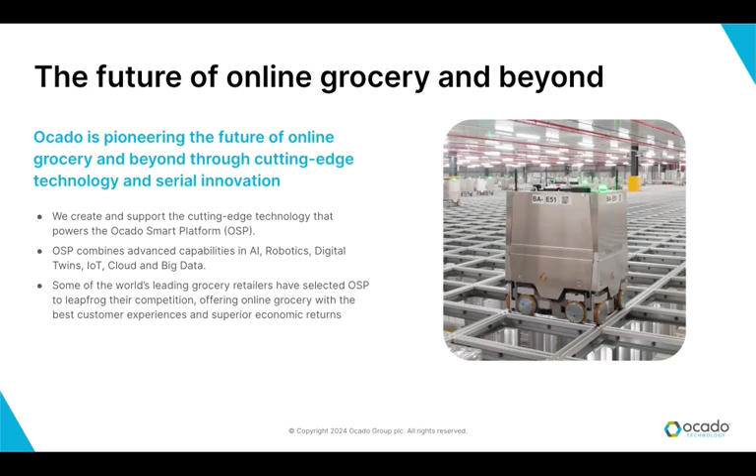What does Ocado Technology do? Ocado Technology develops solutions for online grocery distribution. We are a technology company providing end-to-end warehousing, storage, and logistics solutions for supermarkets. We started by creating our own supermarket - in the UK there is a shop, Ocado, where people can order groceries. The shop is online only, so there are no physical stores, just modern warehouses, which I will tell you about shortly. At Ocado Technology, we are more than 5,000 people working in different domains: software engineering, artificial intelligence, robotics, and data science - a lot of smart people working on interesting projects.

The business model of Ocado Technology and Ocado Group is to sell these warehouse solutions to different supermarkets around the world. The biggest clients are in North America - we have Sobeys, Kroger, Coles supermarket in Australia. We recently opened supermarkets in Japan and are working with Korean partners. So there is a big spectrum and a big challenge for us to create those solutions.

Just to visualize how Ocado is organized: the conventional way has delivery vans bringing goods to the warehouse, and then from the warehouse everything goes to the shop. But here we just have a warehouse, and the delivery goes straight to the customer's home.

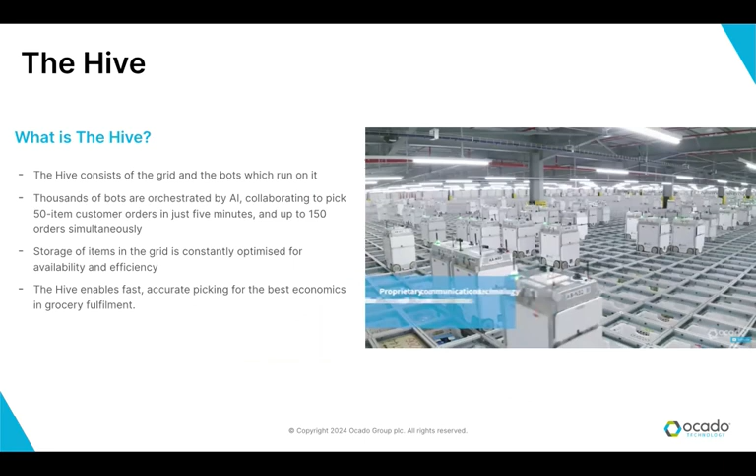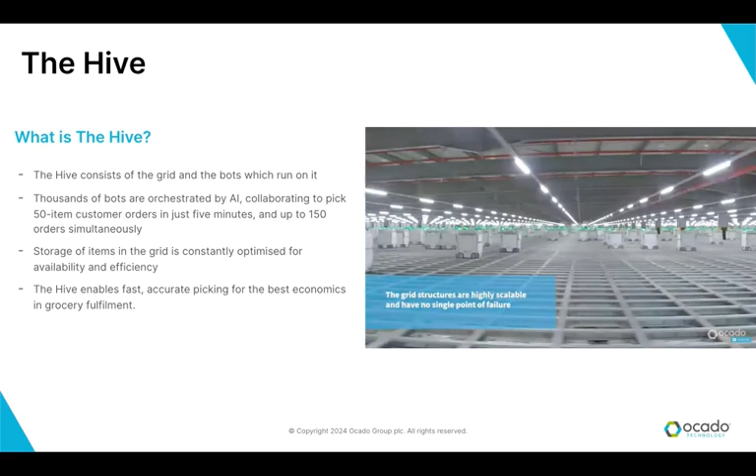So what is the Hive, and why do I talk about it? The Hive is a three-dimensional storage facility where robots move on top of a grid, collecting items and bringing them to the packing stations. This grid is three-dimensional and can be sized in different scales - applicable for small or large warehouses. The biggest grid we have is in London, with maybe 400, 500 robots, if not more - I might be mistaken on the exact number, but it's huge. We have two such grids next to each other: one for ambient temperature, the other for chill temperature, for products that go in the fridge. The robots are coordinated independently - they're not aware of each other, but they're coordinated from the top.

Here you can see the way we simulate and model our grid, because it's a complex system. Before releasing it, we need to understand the optimal amount of robots that can go on the grid, what operational conditions we can set, and what possible faults can happen with those robots, so we model and create all the possible faults.

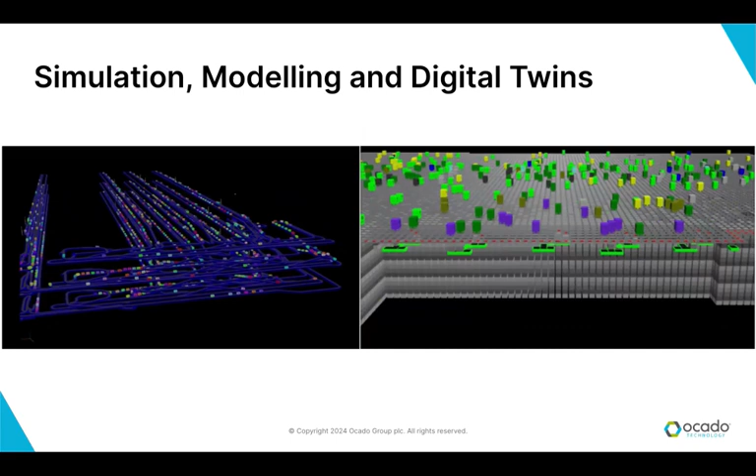On the left-hand side is our old generation warehouse, where everything operated with a conveyor belt, requiring much more land and space. We created that simulation after the warehouse was built because it was old technology, and we wanted to analyze how things were working. For the new warehouse, we first created a digital twin, built a model, evaluated different conditions, and only then built the warehouse. We still do it this way to this day - create a grid in simulation, create a twin, evaluate conditions, and only then build the actual warehouse.

Okay, now I'd like to move on to our most advanced product that is already operational in many warehouses in the UK. We call it on-grid robotic pick.

Previously, customer items picked up by those robots would be packed at human stations. But in this solution, some items are packed already by the robots on top of the grid directly. This way, we save even more space.

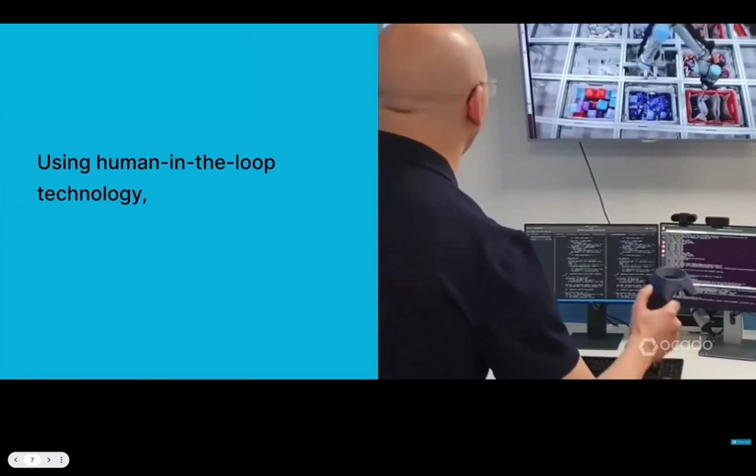While the order is being prepared, we use telemanipulation to control those stations, and a lot of machine learning to understand how to grasp the items and how to pick them.

So these are the stations on top of the grid, as you can see better in this video. The robot is moving. The robots on the grid, I call them washing machines - they come, deliver a storage container with an item, and the robotic arm directly goes there and picks for the customer.

But why are we here, why do we still do research, why are we so interested in robotics? The reason lies behind the need to grasp a large variety of items. We sell anything you'd find in a supermarket. Everything has different packaging, objects with different properties, and there's a need to create sophisticated manipulation capabilities handling different types of items.

For example, a bag of crisps needs to be handled very differently from an avocado, which is easily bruisable. Or sometimes we have a vision challenge - there might be a mix of different teas in storage, and we need to understand which one to pick, because there are such fine differences in packaging from producers.

In addition, packaging is always changing, so we can't control what the distributors provide us. The marketing might change and they come up with a completely different design. So this means we need to handle any general object - that's our challenge, to handle absolutely everything. This is possible to some extent - we do use robots, but we can't yet handle everything.

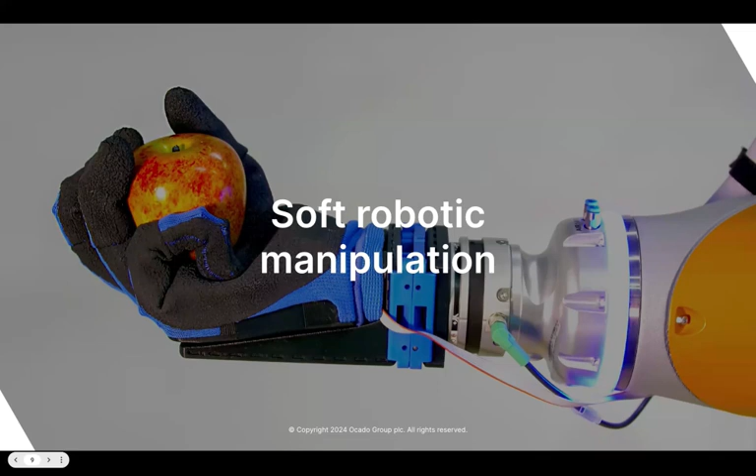So this project covers soft robotic manipulation. We work with different soft grippers and target items that are easily damageable. Moreover, when we do it, we look at the environment we're grasping within.

These are the top views of the storage containers we can have in the grid scenario. We handle items that are very scattered, items that are relatively easy to pick, and also items that are tightly packed with maybe very few gaps between them. Here we exploit the environmental conditions - if we have a wall, we can push an object against it so we have a better quality of grasp.

So we created these scenarios. The top three rows are the 3D printed objects, the emulated objects, and at the bottom you can see the representation of how it is in the warehouse, how it comes to us from a distributor.

We had all these different robotic hands provided by partners from across Europe. The project was coordinated by the Technical University of Berlin, and there's a hand followed by them, and then some hands from Pisa - maybe you've seen some of them.

So these are the grippers we tested, and in the course of the project we went through several iterations of this hardware and performed benchmarking and evaluation.

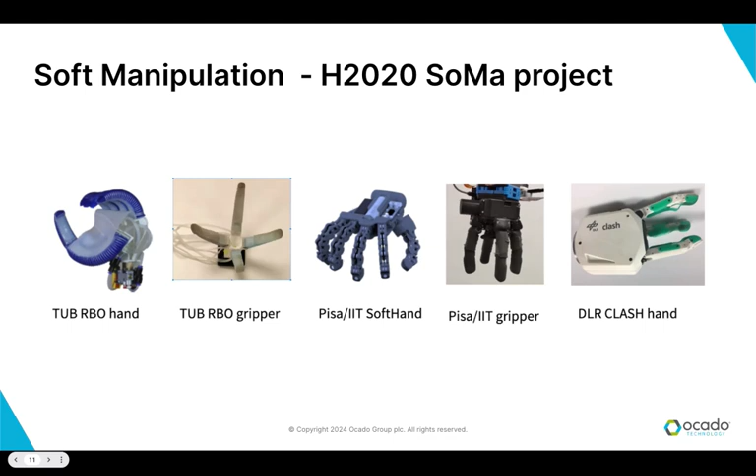So there are many things that we need to evaluate and look at. What we did in our evaluation is change the approach angle and looked at what are the best ways to grasp the objects with those hands. Maybe there is a gripper that allows relatively easy change of orientation to grasp multiple items efficiently.

This just shows us a final demonstration, sped up. Because it's a research project, we absolutely understand we can't go with high speeds. This shows how we're exploiting the environment for different types of grasping, in order to form different relations with the items. And eventually we'll clear out the whole storage container.

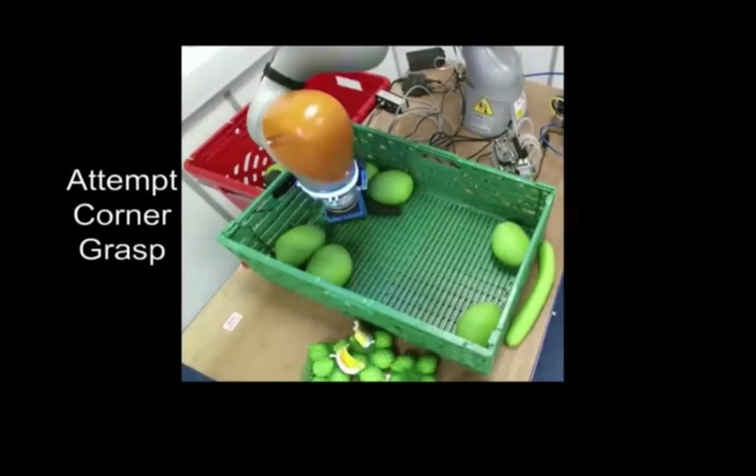Then we also engaged in collaborative robotics, creating a robot assistant that would be able to work in our warehouse and help with performance of some of the maintenance. This is a project that I coordinated to work towards the end of it. A little bit of a baby, but I'm glad that baby graduated.

Here you can see the task example. The technician would come to the conveyor belt—in some cases you might have a still conveyor belt system—unscrew the top lid, perform some cleaning operation inside, and then mount the lid back. In this case, you need to provide assistance to a human.

In order to provide this assistance, you need to understand the intention. And when you understand the intention, there are more challenges because the operation is not scripted—you are dealing with a human. This means there might be uncertainties, unexpected events, situations that go out of control, and the robot needs to take into account all those situations and also provide help proactively.

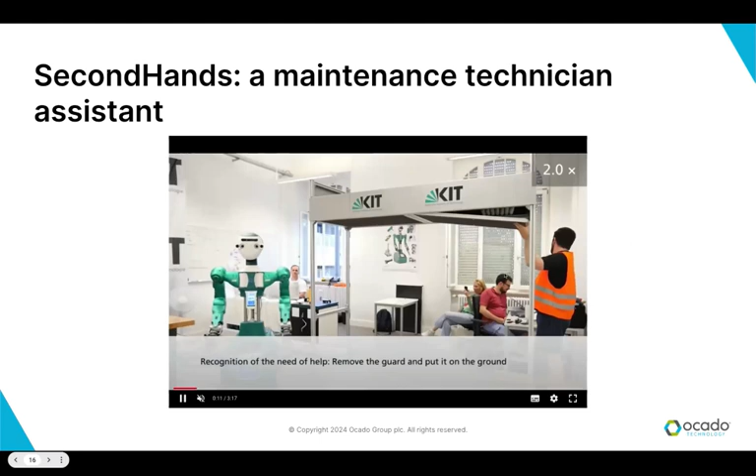So this is what we worked on. Here is a little demonstrator, which hopefully loads. Here we remove the top lid, then the robot goes—I can see Giorgio went away, because this is something similar that will happen in the SestoSenso project in one of the use cases. The robot is moving, leading the manipulation operation, adjusting its grasp in order to have better stability, and helps the human placement. Then it continues.

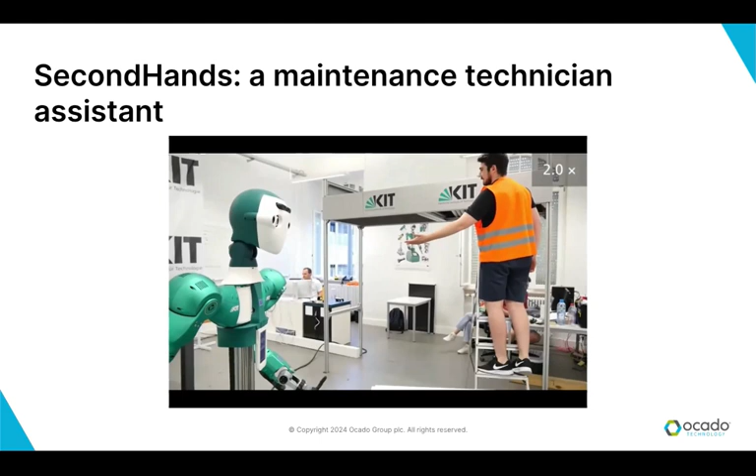And then the robot can also help bring some cleaning materials, assist, etc. You can give commands with voice, or the robot can recognize the activity based on visual perception.

Now I will move to some of the projects we work on now. Again, we are still interested in advanced manipulation capabilities to effectively expand the range of items we can handle. The first project is coordinated by University of Genova—this is the IntelliMan project, where we try to understand how a robot can efficiently learn to manipulate in a purposeful and highly performant way.

In that project there are several use cases—example scenarios inspired by industrial cases where we test the technology and innovation. From the Ocado side, we are looking at manipulation of fragile, loose, unpackaged fruits and vegetables—when you need to handle individual items, or maybe handle multiple smaller items at the same time and pack an order in a designated punnet.

Maybe customers are ordering, say, 200 grams of Brussels sprouts, then the robot would need to provide order on demand—similar to when we go to a physical supermarket and select our fruits in a certain amount. So this capability could potentially be implemented for an online supermarket as well. Then there's a use case of a kitchen scenario, and a use case where we assemble flexible wires into safety connectors for automotive.

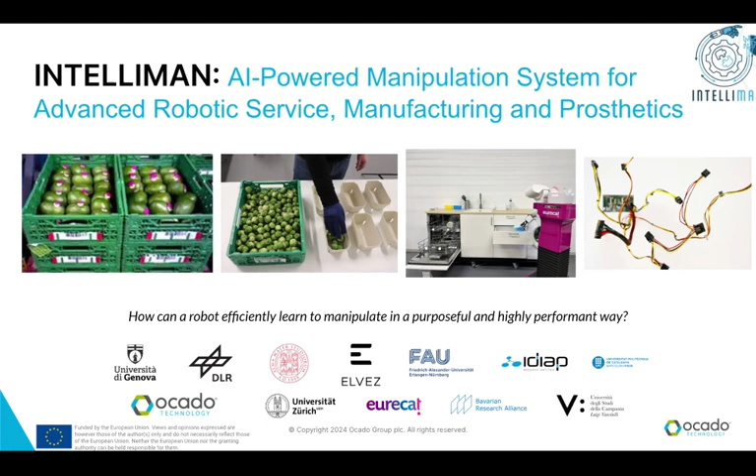So, looking at our use case in detail—why is it complicated? Well, first of all, the environment is very dense. The items we're dealing with have high variability: different sizes, different stiffness. It might be very easy to damage some items, while some items might be rigid.

We need to consider this, because at the end of the day we want to deliver undamaged goods of good quality to the customer—damage is absolutely unacceptable. As we do in many projects and in a lot of research, we look at the way humans perform operations, and by looking at this we can understand the most efficient and effective strategies that humans can implement.

Here particularly we have noticed how people differentiate between grasping individual items one by one, or grasping multiple items together. There are different strategies that can be used, and we are learning from this. Based on that, we don't only design our grasping approach, we also design the hardware we're using.

The hardware can be inspired by the way humans do things. We don't aim to replicate a human hand, but we aim to replicate the capabilities of human manipulation skills. The project is ongoing, this is the initial prototype we've created. The gripper is designed by University of Genova, Giovanni Berselli.

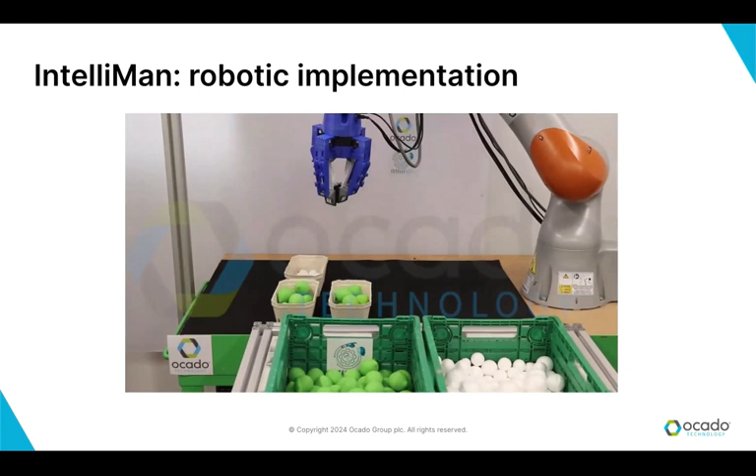That's the gripper. One example here is how, with maybe limited tactile perception capabilities, we can grasp multiple items. The next stage would be to understand how we can reduce this damage. We perform different tests which help us understand how the criteria and key performance indicators are implemented for different scenarios and hardware configurations. So this is this project.

The next project is called SoftEnable. Here we look at how to manipulate things, but the challenge is manipulating flexible objects. When it's a rigid object, we have certainty - even if we don't know the model, we can still relatively easily predict its motion inside the gripper. But with items like fish or meat, anything that deforms unpredictably or has different stiffness qualities, we need a different manipulation strategy.

This project is for 4 years. Fish and similar items are one use case, and there's another use case: the hospital scenario where nurses need to handle personal protective equipment. Before surgery, they prepare piles of PPE and hand it to the dressing-up stage for the clinicians and nurses. This operation is very repetitive and also requires manipulation of highly flexible items.

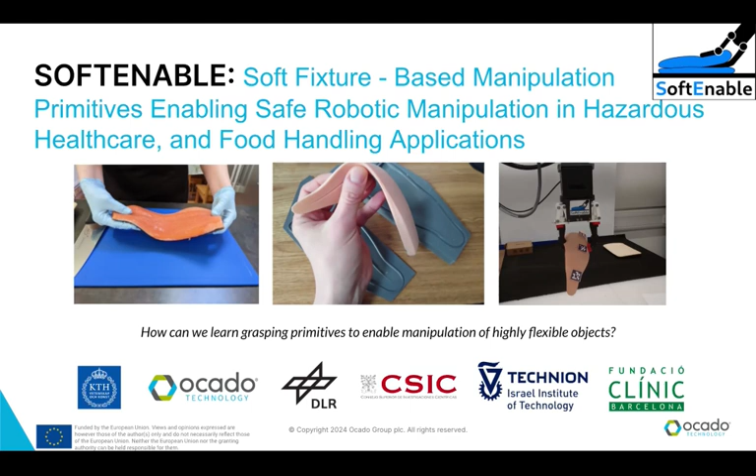It's not only grasping, placement comes into play too, because if you have a tray you're packaging for customers, there are certain rules for how you pack fish. The fish should go with skin on one side, flesh on another. If you place a second one, you can't overlay the two because you contaminate the flesh. So you need to control the placement in space, and that brings in control of the shape of the fish, which depends on the way you grasp.

Here comes the SestoSenso project, the project we're all working on, that's why we've had a meeting here. We look at manipulation of large items coming into our inbound area, the items coming from delivery lorries into the inbound area, then loaded into the grid. These items come in, and need to be unpacked, unwrapped, unloaded from the pallet, and placed inside the grid.

We look at bimanual whole body manipulation, and we're keen to try different sensing technologies, to see how applying tactile skin and other sensing modalities, such as proximity, can help improve the control we're developing for the robot. Here's an example of things from the warehouse - there are absolutely different shapes of objects. Things can be rigid, maybe heavy, or articulated inside, like this bag of potatoes, where the potatoes move inside, so you don't have a stable item to manipulate.

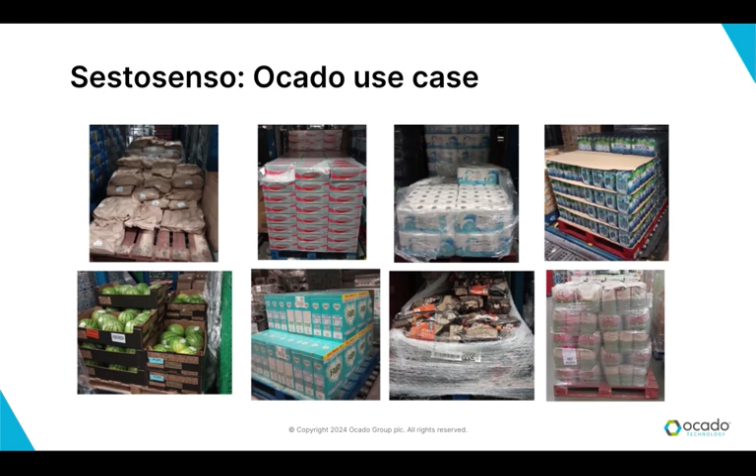Looking at the system requirements, we performed some studies of human grasping, trying to understand how humans do things, what are the challenges, what are the strategies. Humans might be lifting something, rotating objects. When we pack, we might be sliding an item, we might be rearranging. These are all things we need to take into account.

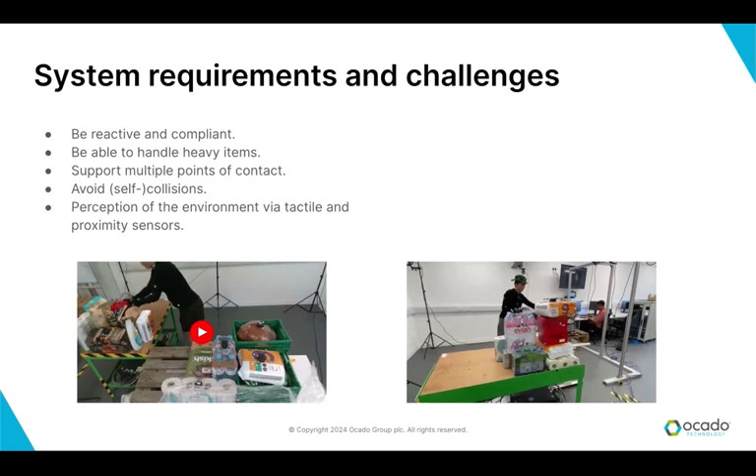And absolutely, without any perception of the environment, we can't handle anything that is deformable, anything that is fragile, and essentially not a virtual solid block, because we will be damaging, losing, and dropping items.

There are some questions we need to answer. How can we determine those kinds of contact points? Sometimes we might have a sensor available, sometimes we might miss sense, how to propagate this and predict, and how to handle the unreliable performance from sensors, because it is hardware.

Sometimes, even if the sensor is good, over time we have some deterioration of signal, some damage. So how to detect that and understand when it's time, maybe, to change the sensor or adapt your control strategy to the appropriate sensor signal.

Again, we look at safety, how to understand if a contact is expected, from an object, or unexpected. Maybe the robot is working in a collaborative environment with a human, whom we need to detect. So there are many things which we take into account.

And I think that's it from my side. If you have any questions, I would be very happy to answer.

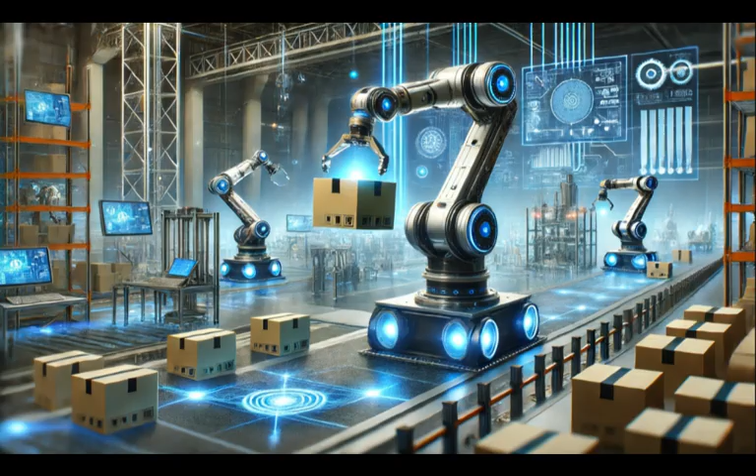In the gripper, do you have tactile perception there, or is it just compliance?

So that's just exploiting the compliance of the gripper together with environmental constraints. We didn't put any sensor.

I have a question. In the previous slides, you mentioned that these boxes have walls, and you can use this function of pushing objects to then pick them up. Maybe you could elaborate how you implement these types of functions.

Yes, so this is part of our planning. We would design a planner that takes a different repertoire, and then, based on sensor information from the environment, for example, we have a scene where we place items. We would have a camera which gives a point cloud, so we can see some gaps in the scene. We can also use our proximity sensor on the wrist of the hand to explore the environment, to enhance the understanding from the robot's perspective, of all those gaps.

And then the planner would recognize the gap in the scene, and it would send a signal to the controller to implement a specific action. So you need to create a planner, and then you need to send a command to get your sensor information and send a command to the controller to implement a certain type of action.

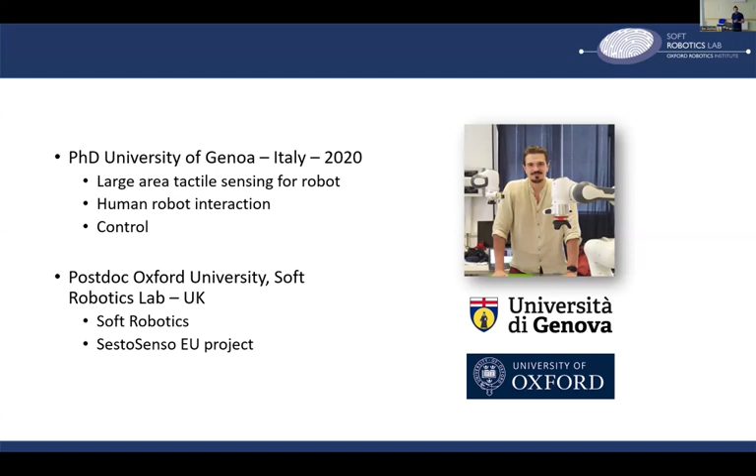Then after the PhD, I moved to Oxford when I started working also on soft robotics, and now I'm basically 100% working on the SestoSenso project where we are trying to embed tactile and proximity sensing. So, that's basically the outline of my talk here.

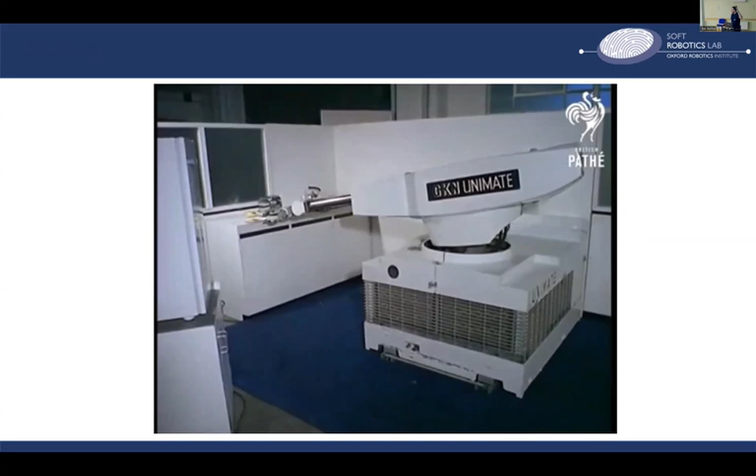I would like to start by saying why tactile sensing is important for robots. I like this video, this is a very old video. The robot that you can see there is called Unimate. It was the first industrial robot ever commercialized, so we are talking about 1960. It was groundbreaking at the time.

And a few years later, the company released this video, showing their vision of the future. They were saying in 40 years, that's what the future will look like: robots are going to share the environment with humans, supporting them in everyday life tasks. Now it's about 60 years from this video, and I think no one has such a kind of machine.

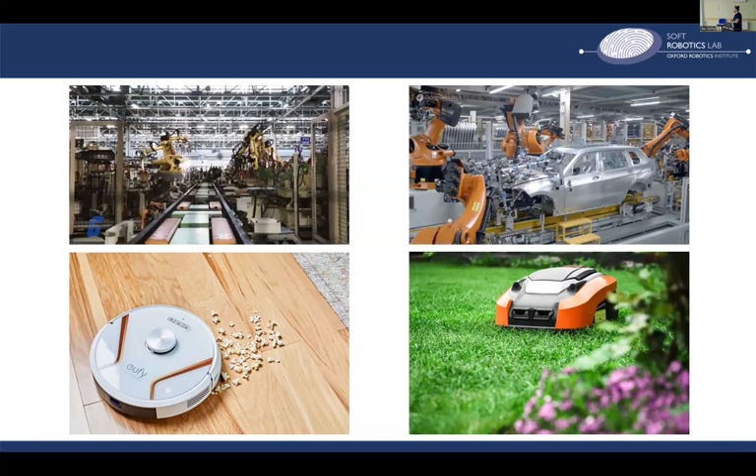So which was the problem? We were very good at approaching the problem as an engineer. We had a task, and we were very good at making robots solve specifically that task. You can see some examples here. Robotics was very successful in industrial tasks like assembly lines, where you have just one single task, there is no uncertainty, you always repeat the same movement. But actually these robots are not so human friendly - usually they are kind of constrained in a cage to keep them separate from humans because they are dangerous.

Another example: if we take the vacuum cleaner robot, again one single task, it can deal with some degree of uncertainty, but if your furniture is not arranged so well, you need to make room for the robot to be able to clean. So what's the problem? Sharing the human workspace is very challenging.

So how do we move from this environment, like industrial settings which are very constrained, well defined, where everything is repeatable, to our world, which is messy by definition. We are asking a robot to perform not just one, but a wide variety of tasks in an environment which is uncertain, and so it's likely that robots are going to collide with the environment and with humans. So we need ways to manage the collision in a safe manner.

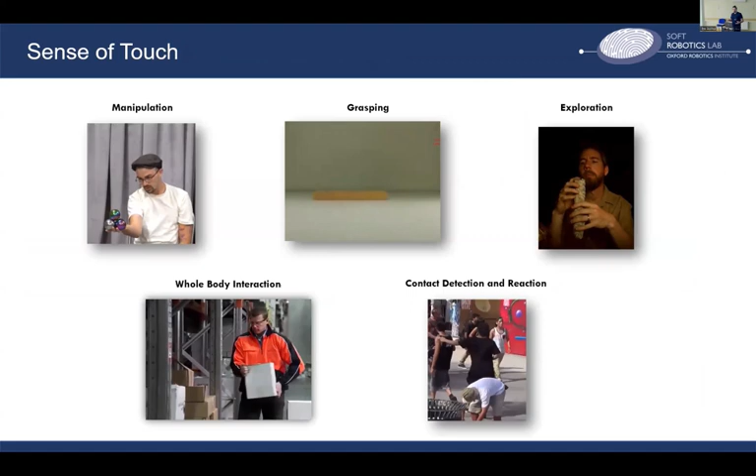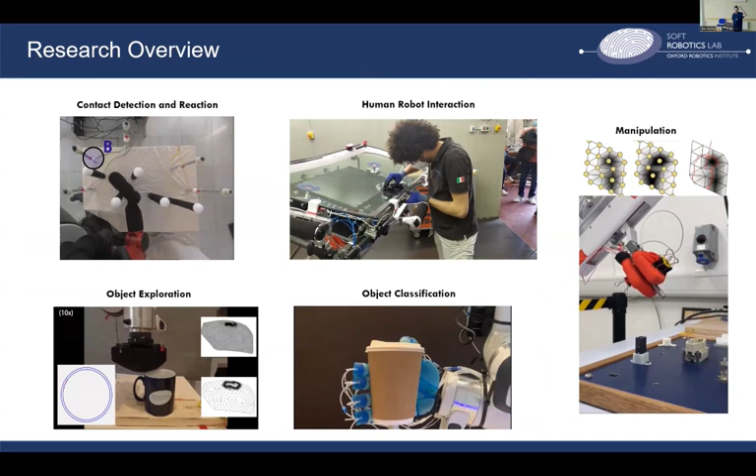If we look at how can we do it, and take a human as an example, we primarily use the sense of touch to deal with manipulation, grasping, contact detection and reaction, but we also use it for exploring objects and also to interact with objects, sometimes using the whole body. The thing is very simple: if it's useful for humans, it would be also for robots. And that's my research - since I started the PhD, I tried to use tactile sensing, whole body sensing, to transfer this skill to robots. I worked on contact detection, reaction, human-robot collaboration, exploration, classification, and so on and so forth.

So I'm going to give you an overview of some of this aspect in this talk. First, just to clarify, what is a tactile sensor? Here, what I mean by tactile sensor—because tactile sensing is multimodal—I'm just referring to devices capable of measuring a force or pressure distribution.

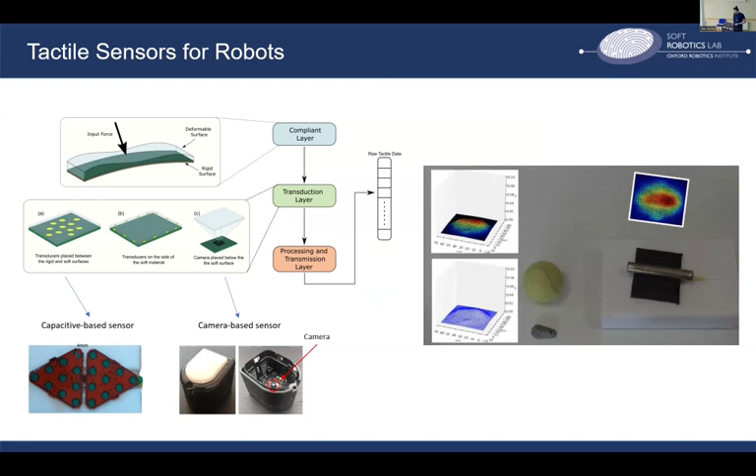Maybe Giorgio will talk about the challenges of scaling from small area to large area. Large area, full body tactile sensor skin—how do we call it—are basically tactile sensors that can cover possibly the whole robot body. That's the kind of output you can see, that's the iCub skin, developed by the University of Genova. Here you can see the type of output you get: the precise contact location, the whole pressure distribution, and you're able to measure multiple contact forces, and so on.

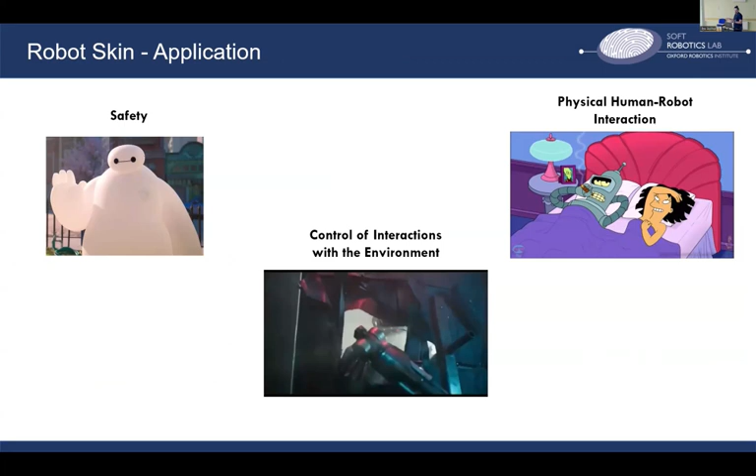So how can we use this skin? There are many applications, related to safety. If you have whole body sensing, you can detect forces and maybe stop the robot or react. We can use them to allow a robot to execute tasks possibly without destroying the environment surrounding it, and we can also use it to interact physically with humans.

Now I just want to talk about the first point: how can we use skin for safety and control of the robot? The idea is we want the robot to execute tasks in a constrained environment. Imagine, for example, the environment Lisa showed before, where the robot has to perform a task and there could be an obstacle in the middle.

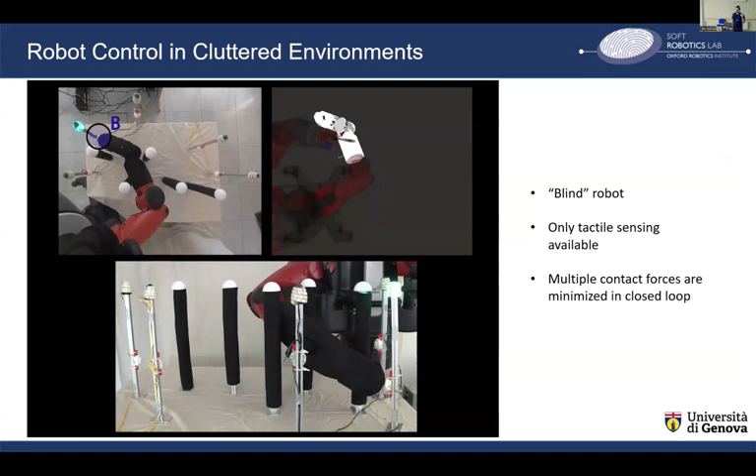We tested this. We created a scenario where the black part is covered with tactile sensors, and the idea was that the robot had to reach a target location with an obstacle in the middle. The robot was blind in the sense that there was no vision—we just gave the target point and asked the robot to reach it. We used the skin to perceive the contact points and forces on the robot, and set up a control pipeline where we tried to minimize contact forces while reaching the target. So the robot can accomplish the task without destroying the environment.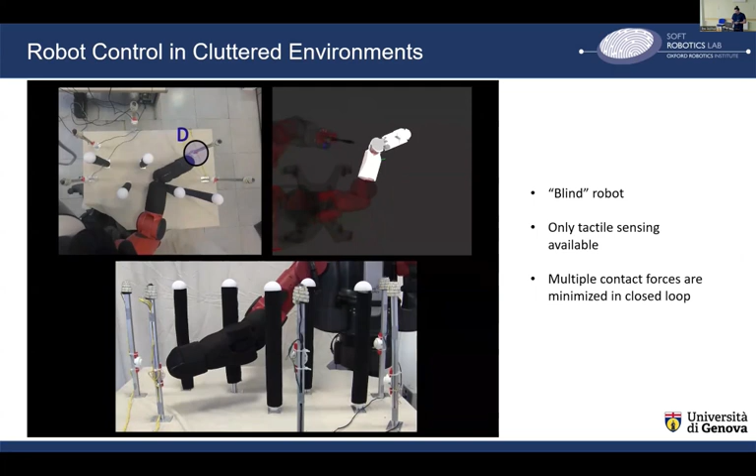For human-robot interaction: a few years ago, during my PhD, I was involved in the European project Collaborate. One use case was a manufacturing environment where an operator had to perform assembly operations close to the robot, on a windshield of a Maserati car. The idea was that a robot would support the operator, unloading the weight of the windshield, while the operator moved it in an ergonomic way depending on the operation he had to perform.

The problem was, how can we provide a smooth operation? One idea was to use tactile sensing to enable the motion of the robot. But the problem was you can't just say, if I'm touching, just move—because in this kind of operation the human could collide with the sensitive part. So we needed some processing to understand if the human was applying a purposive interaction. The assumption we made at the time was: if I want to generally interact with something, I use my hand, approaching it with the hand.

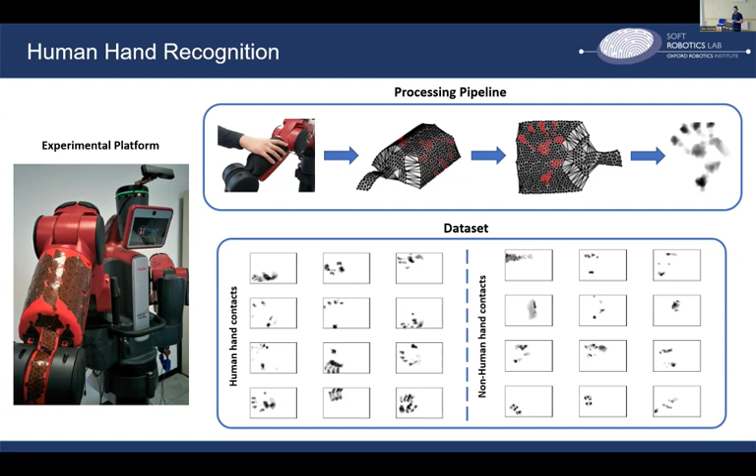We involved a lot of people to collect this data set. We asked many people to interact in different ways on the robot to make sure the classifier is able to generalize with respect to different human hands and sizes. We also took another data set of everything else but human hands. So at the end we trained this network, and we were able to transfer it to different geometries. That's the final setup.

To process tactile data, we use images, but it involves a set of operations. For example, here the geometry is not flat, it's 3D. If I want to extract the contours of that contact shape, I first have to make it flat, then perform an interpolation, create the image, process the image, come back to the 2D domain and then back to the 3D domain. So we wanted to find a way to avoid this complex processing pipeline.

What we explored was basically the use of a mesh convolution based on mesh, so we could directly process the output of the skin as it is without making any transformation. By changing the weight of the filter, we can implement a high-pass filter directly in 3D and extract the contour. In this case, we were asking the robot to follow the mark.

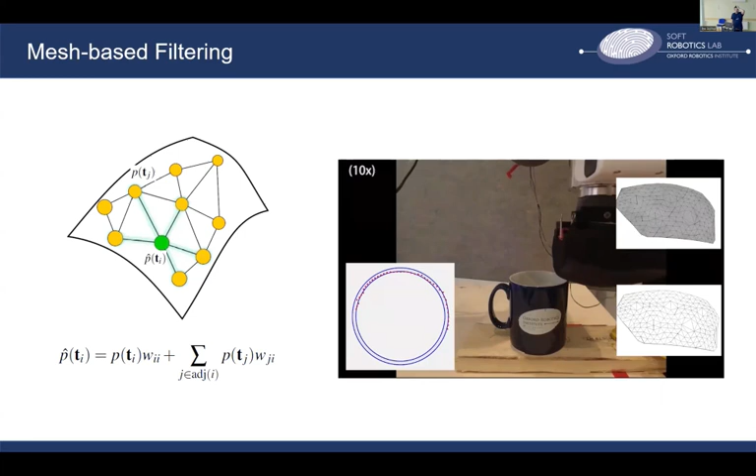For the last part of the talk, I wanted to discuss some of the work I've been doing since joining Oxford with Professor Maiolino. We were interested in understanding how the body affects the tactile responses - what's the role of the body in that?

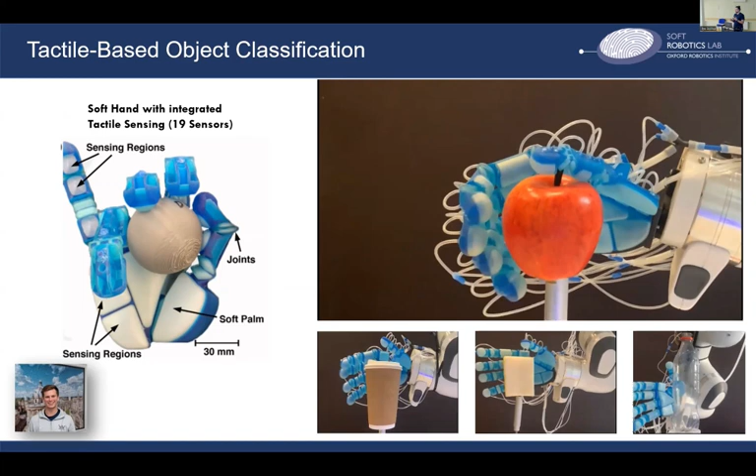So we designed this soft hand, a pneumatic hand. The white pads that you can see are tactile sensors, and they work in this way: you have a hollow chamber filled with air at atmospheric pressure, with a pressure sensor on the back. When you press on one of the white pads, they detect the variation with respect to atmospheric pressure, and you can associate it with a pressure distribution.

The hand is compliant, so it conforms to objects, and the control we apply is quite easy - every chamber is connected to the same pipe where we can suck the air, and the hand is going to conform to the object. Depending on how the hand is touching the object, this produces a different tactile signal, which you can see in the activation.

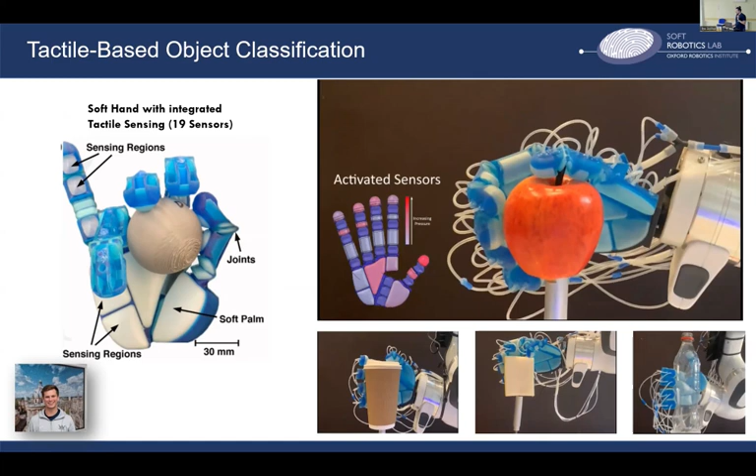So we thought that this could be useful for object recognition. We set up this pipeline where basically we...

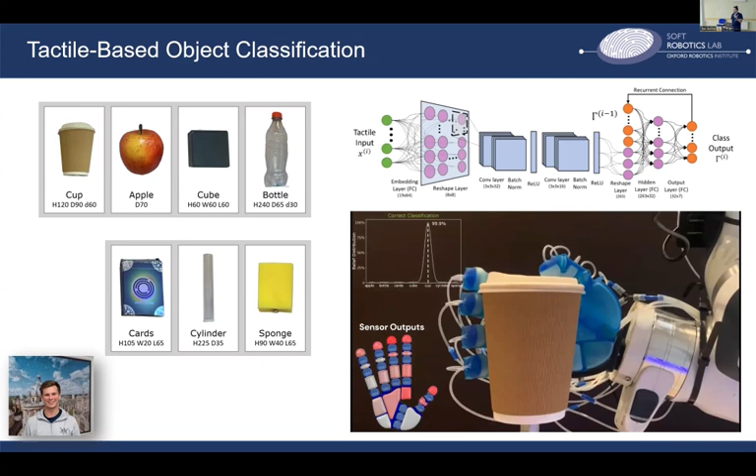The video stopped. Okay, so we set up this learning pipeline iteratively, where the robot, by increasing the number of grasps, is increasing its knowledge or confidence in the object recognition. At the first grasp, the robot is confused between one or two objects, and by increasing the number of grasps, you get higher and higher confidence. You can apply this process as many times as you wish, and just stop when you have a certain confidence level.

Of course, we are using a lot of machine learning to do this type of task, but actually there is a catch.

So tactile data collection is quite hard because we need physical interaction, and this is time consuming. If we imagine an object recognition task, every time we want to explore the whole object, we need to cover all the surface. This is a problem because the way I interact with the object changes the response, if I use less force or rub on the surface versus having a static contact. Usually to do that, I need a controlled machine, a robot. And sometimes full exploration of the object is not possible - for example, if I cannot get that sensor inside the mug because it's too big. So it depends also on the geometry of the sensor.

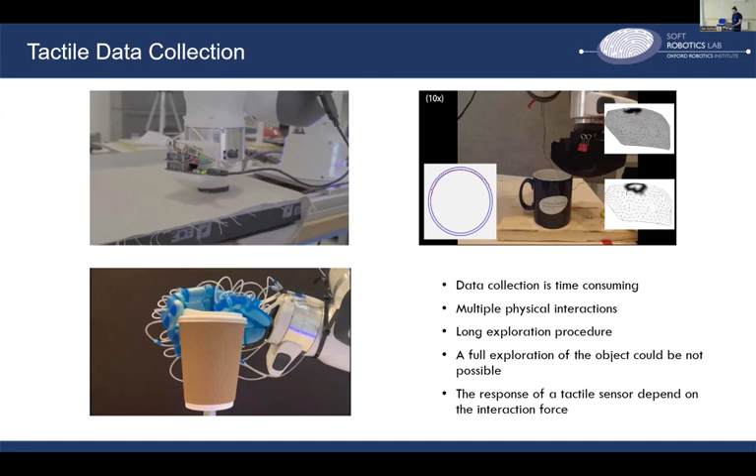So we started with the idea of, can we find ways to train object classifiers which are easier, or maybe exploit other modalities. This is the classical pipeline for object recognition, the state of the art: you have some object, you take some data, you create a representation of the object like images, and you just feed a classifier to train it.

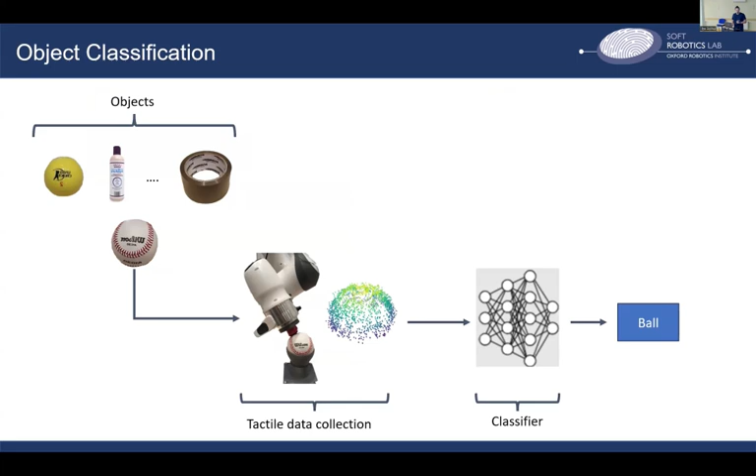So what we started to investigate was cross-modal classification. What does this mean? I still have a classifier that makes predictions on tactile data, but I want to train it using modalities which are easier to acquire, for example vision. So the idea is I use vision to train this model, and this model must perform in the same way when fed with tactile data. And since we don't want to explore the whole object at classification time, this should work also using partial representations of tactile senses.

For example, imagine I'm looking at this table, I have the model of it, so I reconstruct it. When I touch it, I don't need to explore the full table, I just need some features to recognize it. That was the purpose of this work.

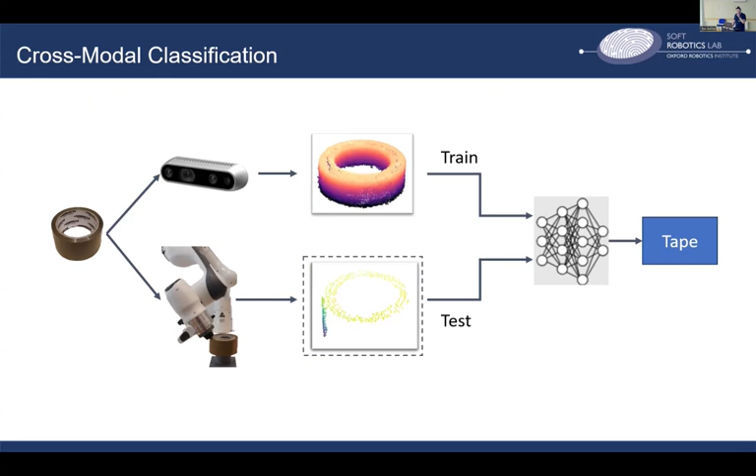So this is the overall training pipeline. What was interesting here is that to make the model robust with respect to this, at training time we set up a curriculum training pipeline where, by increasing the number of epochs, we were reducing the number of points in the visual point cloud, so we were actually feeding other samples.

And this is the type of result that we got. Using 40% of the points of the tactile point cloud, we were reaching almost 90% accuracy, and we were able to get to 100% using 60%.

Okay, I want to conclude with this last work. Previously we were using cross modality to perform object classification. The idea here was slightly different: instead of recognizing the object, we want to generate using images the type of tactile response directly. Imagine you take a picture or get the depth map of a point on the surface, for example on the gear of the turtle. What we want to do is artificially generate the response that I would have obtained by physically touching with the tactile sensor.

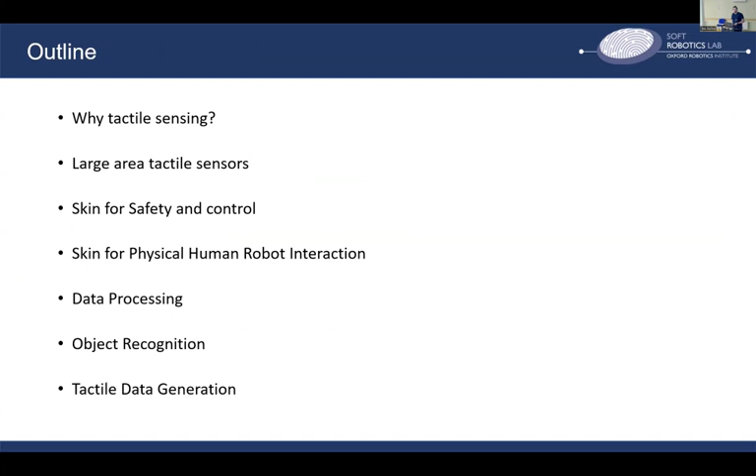Okay, I think this is all. I want to thank all the collaborators who participated in this work. And that's the outline of the talk. If you have any questions, thank you.

It depends on the market of the chips and on the capabilities of the service to manufacture multi-layer and flexible PCBs. Let me say that the higher cost is the PCB. The chips are a couple of dollars, less than two euros.

These are quoted before the Sestosenso project. In the Sestosenso project, we are exploring solutions which might reduce the cost. One of them is printed electronics, because we think that besides the fact that there are different technologies under development, different things...

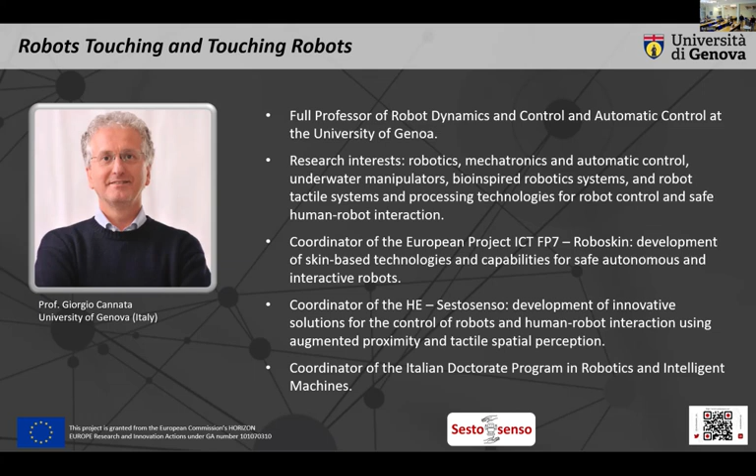Now we have the last talk, by Professor Giorgio Cannata from the University of Genova, about robots touching and touching robots. He is a full professor at the University of Genova. His research interests are broad: robotics, mechatronics, soft robotics, bio-inspired robotics, underwater manipulation, and tactile-based robotics. He was coordinating several projects, as well as Sestosenso, which we are presenting here. He is also coordinator of the Italian doctorate program in robotics and intelligent machines. So the floor is yours.

Most of the things that I'm going to talk about have already been presented, so I'll try to be complementary. And it's Friday, it's late, so I'll try to be as short as possible.

Let me introduce myself. My name is Giorgio Cannata, I'm professor at the University of Genova. Yes, here it is, Italian North Riviera. Nice place, about 500,000 persons live there.

The university has 4 main sites. I'm in Genova, which is the main site of the university, at the Polytechnic School of Engineering and Architecture. I'm part of DIBRIS, which is a department keeping together computer science, bioengineering, robotics, and systems engineering.

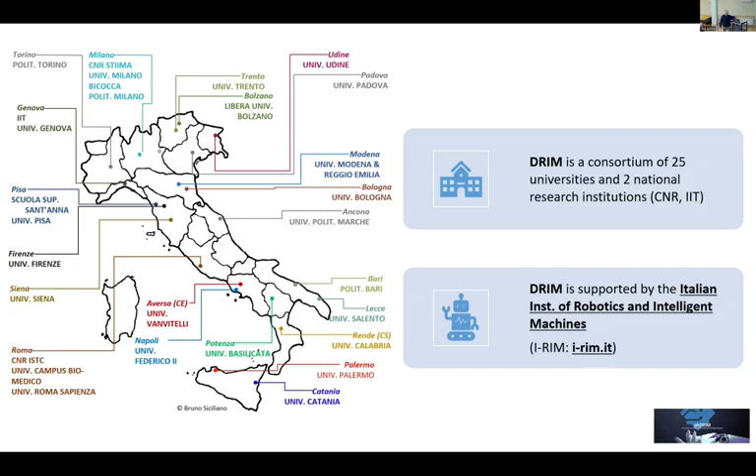It's a consortium of 27 universities and research centers all over Italy. This was the opportunity to bring together students working in all domains related to robotics. We have students working on legal, ethical, and societal aspects connected to robotics. I'm saying this because we belong to different domains - you're scientists, we are engineers - and maybe since we are working on robotic projects, there could be the opportunity for exchanging students and sharing projects at PhD level within this framework, because I think it's a growing community. We are starting in these days. The calls are open for the third year.

The robotics and autonomous systems group is formed by nine people - yes, we had a new entry a few months ago. We are working, most of us coming from the automatic control community, so we work in control of robots, human-robot interaction, and Alessandro has already spoken about that, autonomous systems, underwater robots, application of AI for social interaction, and other areas. One of them is mechatronics, which is part of my work. Sestosenso is one of the projects we have coordinated over the past 12 years.

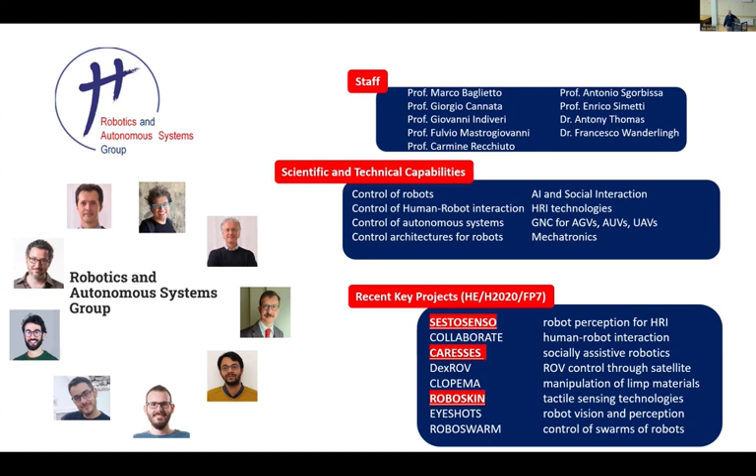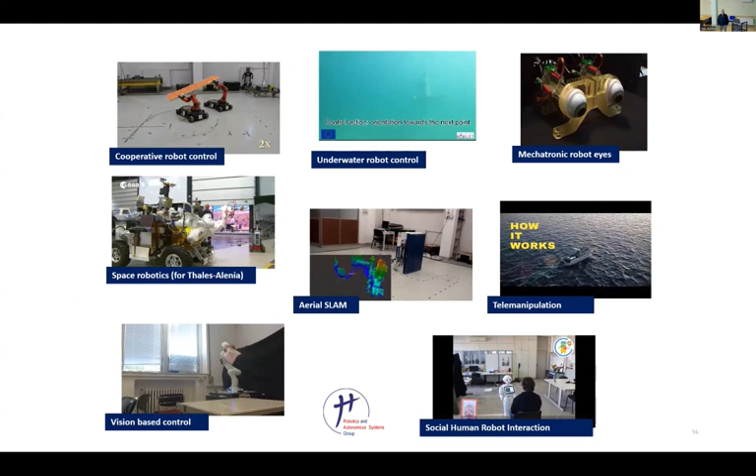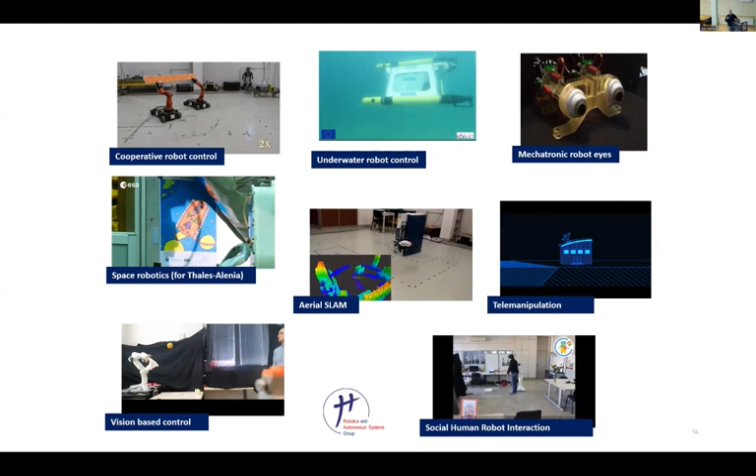RoboSkin is another project that I had the chance to coordinate, and where all the things you are seeing today, presented before by Alessandro, have originated. These are just a few examples of experiences done by the various people working here. So you have problems of cooperative robotics, underwater robotics, space robotics. We had for a quite long time a connection with Thales Alenia Space, and another core business is underwater robotics. I worked on dynamic robot control and other mechatronics applications like bio-inspired robotics and so on.

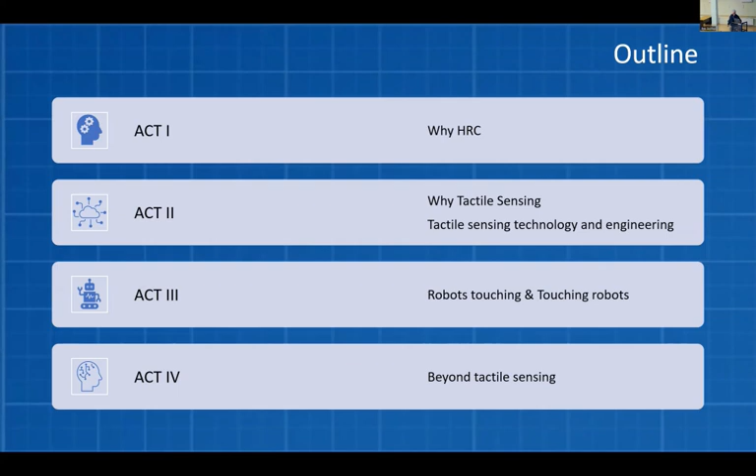This is the introduction. I will move a bit faster. Why robotics? This is interesting because I grew up with the idea that robots are somewhere far from humans, but the idea is that robots should be close to humans. I will repeat the lecture, but the problem is human-robot cooperation, one way or the other. This is what is interesting.

Just a few figures. Robots are a business. The market is growing despite the COVID pandemic and so on, and it's great. It's growing at a reasonable rate. Forget China - I'm talking about Italy, but you should consider Europe. It's a good market, so there are opportunities. I say forget China because 25 years ago China was not there, so they are aliens, I'm saying in a sympathetic way, but okay, they are absolutely outliers.

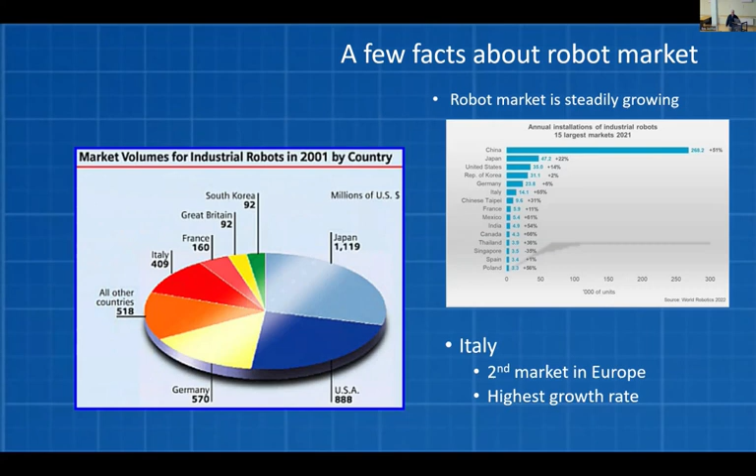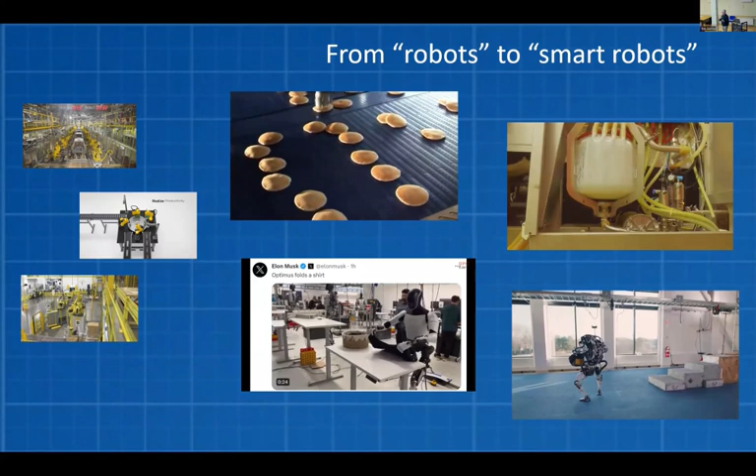Okay, these are the old visions of robots. Now the idea is to have much more suggestive concepts. Humanoids, and I will return to that, are here. Machines for handling cows are products - they are no longer research, they are getting to market faster and faster. This is an interesting point. So I said robots are getting closer and closer to humans, and the market is following this trend.

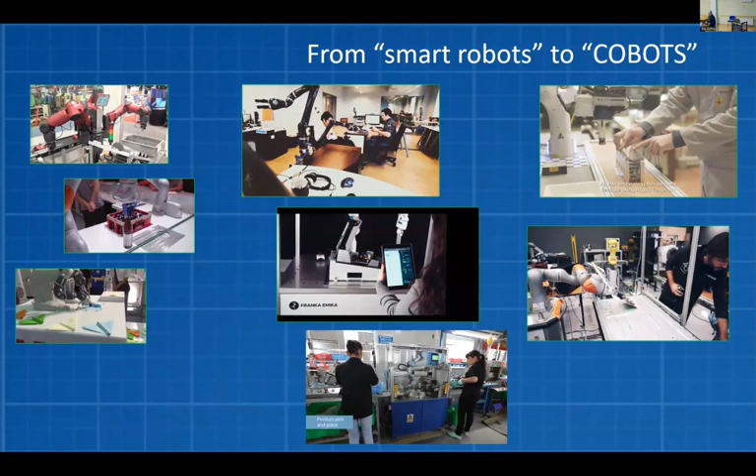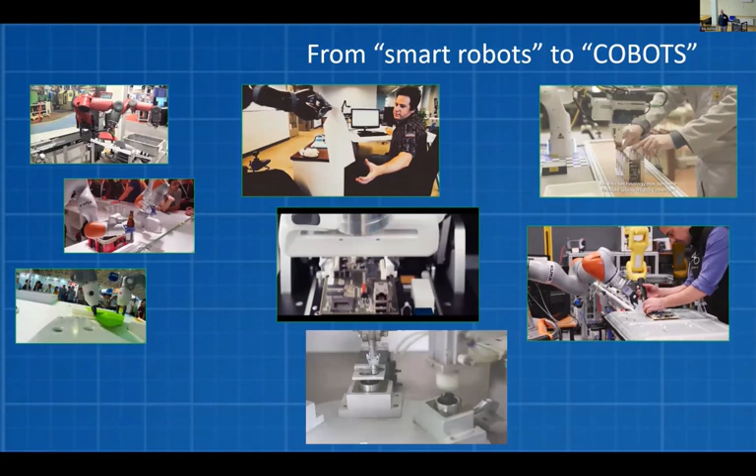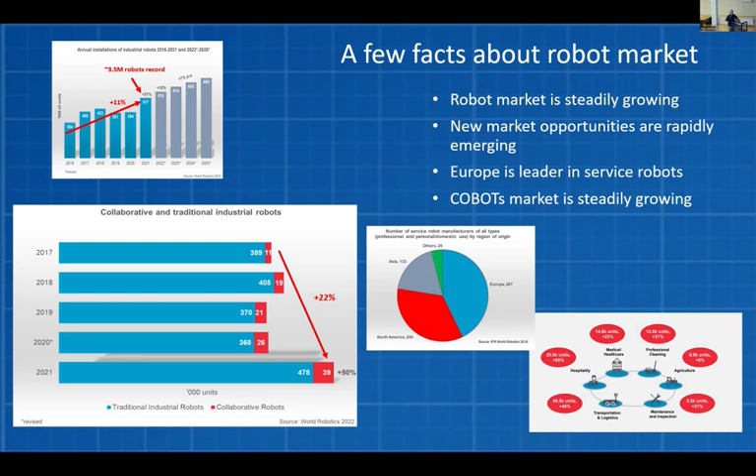The two videos on the right-hand side are demos from a project quoted by Alessandro before, where a few of us were partners, showing the possibility of improving manufacturing capabilities when the robot shares its action with the expertise of humans. This is the market of cobots, which is growing at twice the speed of the growth of the market of standard industrial robots. So in a sense it's not just motivation grounded on curiosity - there is a push to introduce new technologies, and again in Sestosenso we are struggling to find solutions which are cost-effective, not just proof of concept, but cost-effective solutions.

Cobots are things that I'd like to have at home. So the idea of the robot market is not just related to manufacturing, to the industrial aspect, but it's going to become the next car. Maybe you are willing to pay 25,000 euros for a car. I would personally like to pay the same money for a 24/7 device that takes care of my house. So I think we should start thinking of robots and cobots in this sense.

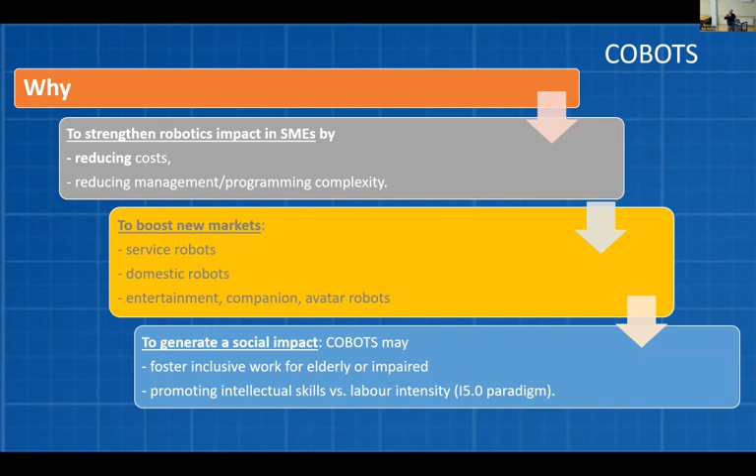Besides service, besides domestic use, there's another important aspect related to cobots: the fact that we are getting older on average. I'm almost 61, and I don't feel I should be placed aside. People have expertise, but maybe they are not as strong as young people. So thinking of a production where expertise can be used by transferring the effort to the machine and using the cognitive capabilities of people has a social impact, because people can keep on producing value. Keep on producing value means social insurance and social costs could decrease, and you could guarantee on average a better environment for the population. These are not specifically technical comments, but they are some of the motivations.

I was a fan of tactile sensing for many years. Why? Because playing music is a tactile problem. There are aspects of manipulation, like grasping a heavy object, where you use your full body—this is one of the ideas within the Sestosenso project. But there are other less immediate aspects related to social interaction. We touch people, and touch is conveying information. This was an experiment done within the European project RoboSkin about 12 years ago, and that puppet was built to enforce the capability of interaction of children with autism syndrome, to help them learn to socialize. Touching the robot and getting feedback from it, which felt the touch with the children, was a way to trigger interaction also with other people present in the scene.

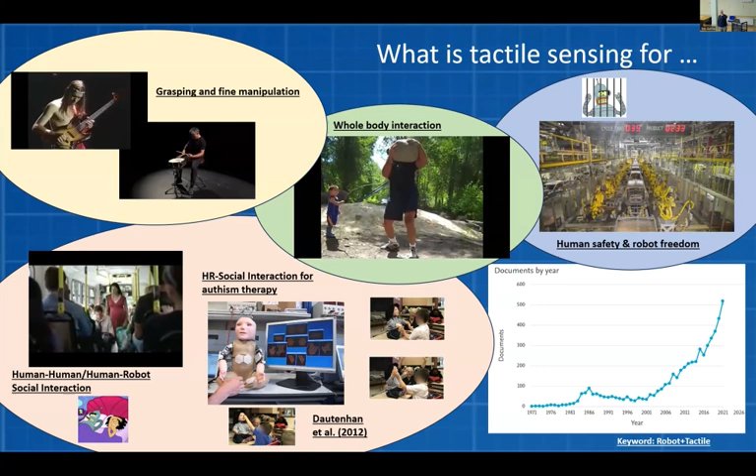There is a side effect. I started working on tactile sensing for underwater applications almost 30 years ago. In the past 20 years, the production, the papers on the subject skyrocketed, and this means there is interest. As Alessandro was saying before, there is interest, but you cannot buy skin for robots because it's hard—it's still not an easy task.

So in 2006, we invented this idea, a modular system which solves quite many of the problems involved in building things which are large. The idea was simple at the time, today it's obvious—it's networking. So we developed a network of embedded computers, and that idea was applied in different types of situations.

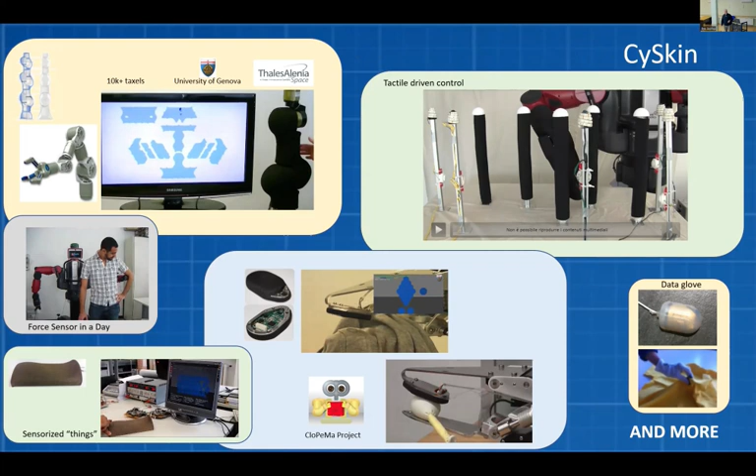This guy here was a PhD student of mine. He's a computer scientist—I think this is the only time he touched the robot. He stayed in the lab for 3 years and was an excellent software developer. At some point he said, 'I want to build my own tactile sensor.' So he took a 3D printer, and I call it 'Force Sensor in a Day,' because it proved that in one day you could design a tactile sensor tailored for the application, and he implemented this demo for human-robot caresses or whatsoever. The video in the middle bottom part is related to another project called CloPeMa, where again we transferred the same technology and ideas. Over the years we gained different types of experience.

I'm going to accelerate because the next videos should be familiar now. I just want to add a few things. We are getting closer and closer to the concept we are exploring in Sestosenso. There is always a duality between vision and touch. The interesting thing is that vision is fast—you see without doing anything. You lay down on your sofa, switch on the TV, and you see whatever is on it. If you want to touch, you must do something—generate a mechanical interaction. And there are situations where generating that mechanical interaction is fundamental.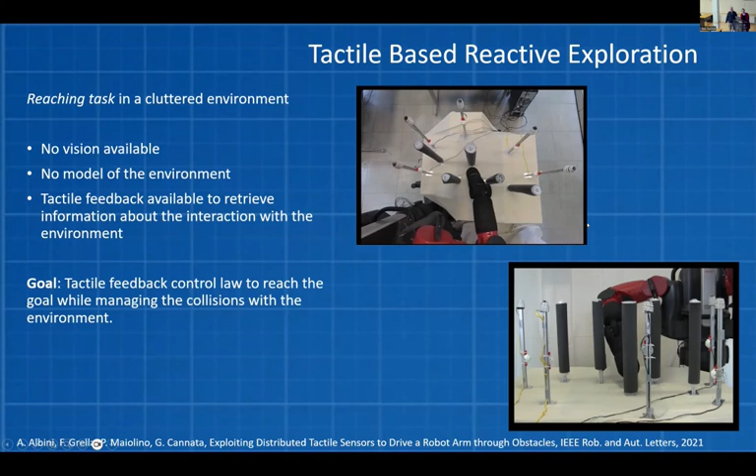But I think we have already seen this, maybe we can take the video of Alessandro. Doesn't matter, don't worry, I'm going to finish. So this is the side of robots touching, and there is a dual situation, which is the world of the problem of touching robots.

Touching robots, it's the real core of the problem of human-robot interaction. And one of the things that we explored, and one of the things that we are going to explore again in the next future within the Sestosenso project, is to take a man and an elephant - I mean a robot, a huge industrial robot - and allow them to interact safely.

And again, the challenge is to exploit tactile sensing as a key medium. This is the demo that was shown before, which represents an industrial work cell where the robot is fully segregated and the man cannot interact directly with the robot.

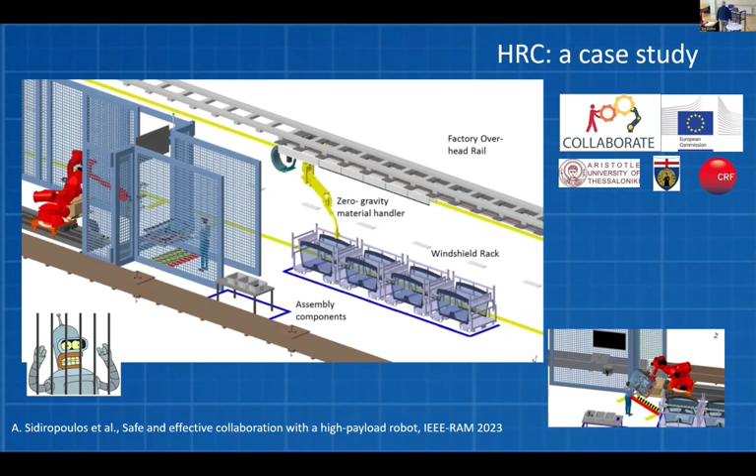So why is this a poor scenario? I mean, the robots, okay, so there should be some safety for that. But the real problem is here, because there's a huge space on the shop floor which is not used for any purpose but just for storing components, and you need additional hardware which is just required to avoid direct contact with the human.

So things become different if the human and the robot can share the same space. And if this is the case, you save room, and you can give the robot additional functions. So you reduce the usage of space, you reduce the number of components forming the cell, and you can get - when I say you, in this case it's Stellantis or Peugeot or whatsoever, it doesn't matter.

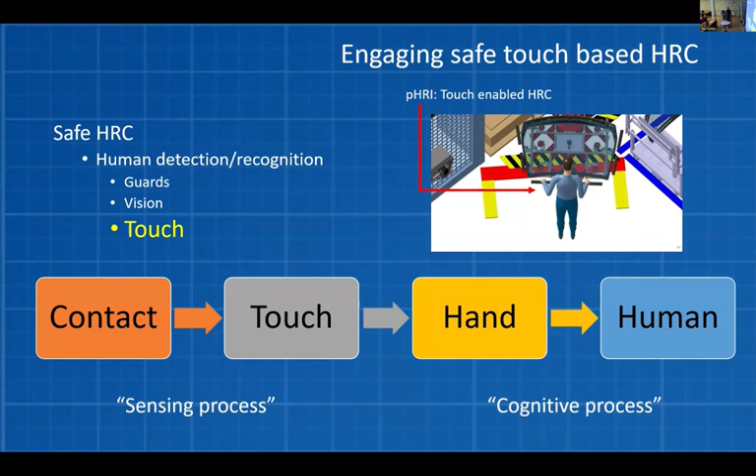So which was the idea? And I'm going very fast through this. The idea is to give a semantic meaning related to the touch in human-robot interaction.

These are a specialization of the demo that was shown before by Alessandro. So we developed these sensorized handles, and this is the idea behind the touch-driven control.

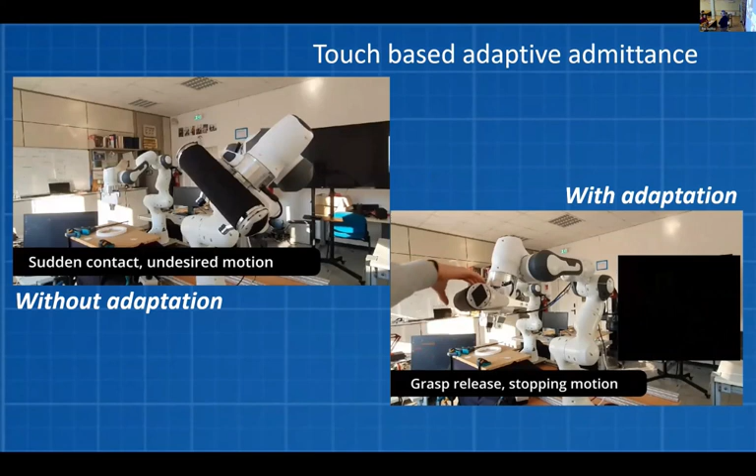In this case, you have a non-compensated robot, so the robot is hit and it can move, in this case in passive form. In this case, the robot is enabled to move only if contact is recognized. You could use a button for that, yes, but that's not the natural way for interacting with the robot. Let me show what happened - this video was already seen before.

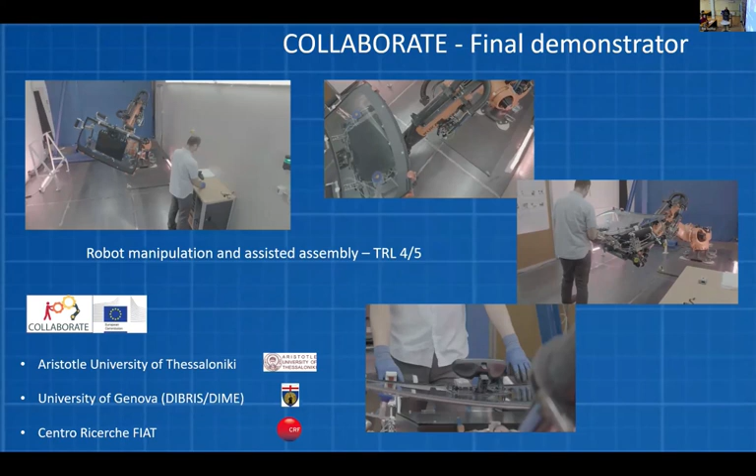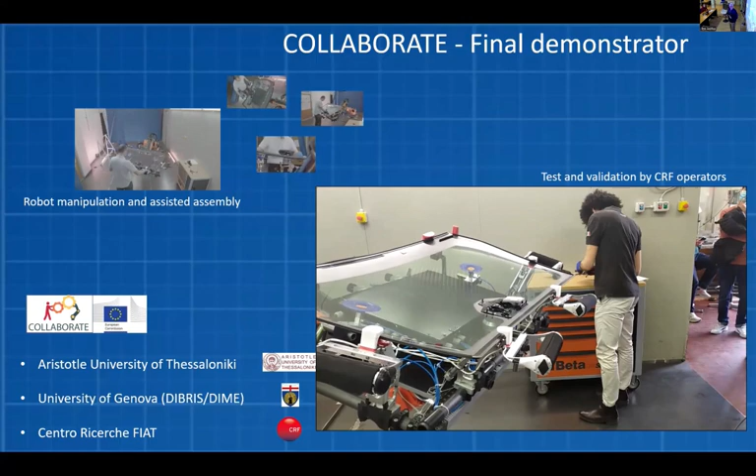This is the general demo that was produced, but you have already seen this video. Let me just say that this guy is an operator from CRF. He entered the lab, he didn't know anything, he just knows his job, which is installing, assembling the parts. He entered, he grabbed the handles, he moved the windshield, which was not a natural task, because in the real environment the windshield is fixed on a table.

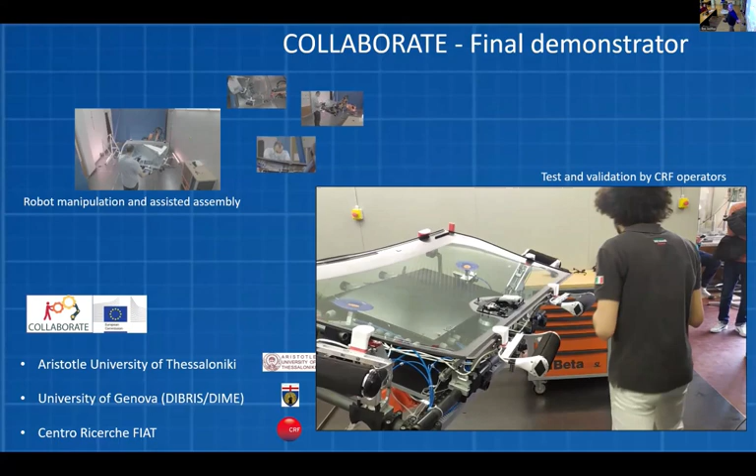So if he starts working on this side because it's comfortable at the beginning of the shift, and after 8 hours maybe he wants the windshield placed in another configuration, he can do it, and in a very natural way, without pushing strange buttons. Actually, he's still pushing a button - let me show where and why.

That robot is a human killer - okay, it's a robot with a payload of 250 kilograms or so. And you have seen the person is pushing a button, and that button is the trigger for the robot. You can see now again, it's a trigger for the robot to say, okay, you are going to interact with the human, so please move very slowly.

But everything in this phase is totally, we say, open loop. There is no feedback, there is no safety in any case, and there is this transition. In Sestosenso, what we want to explore is how to solve this transition.

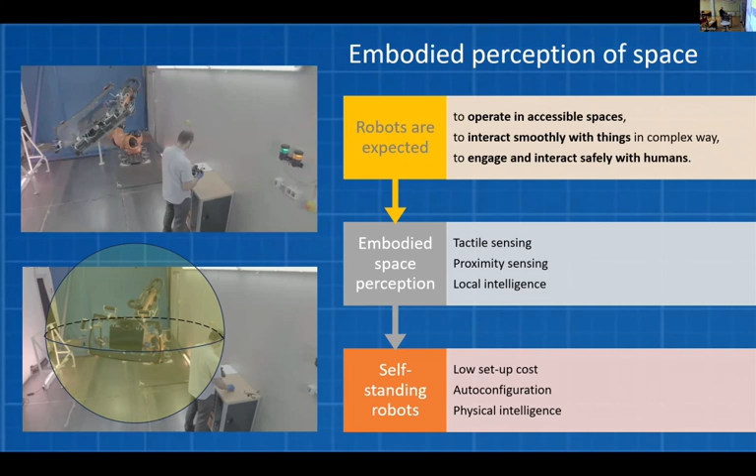And so we invented the idea of giving the skin not just the capability of sensing touch, but to see. And this is the idea of creating a kind of skin vision system.

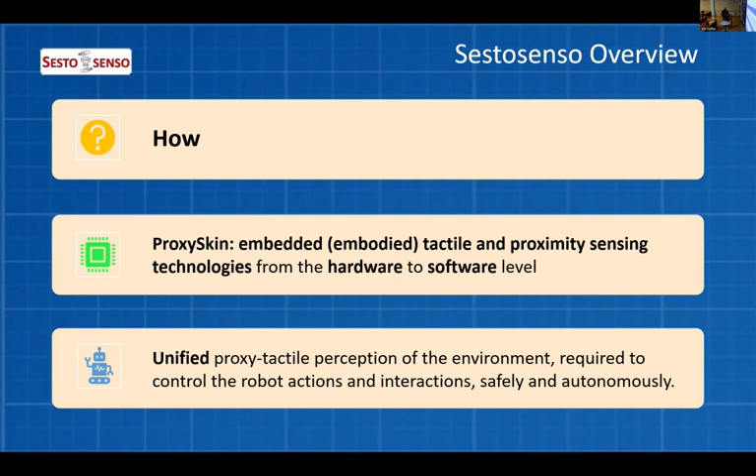This is the headline for the project Sestosenso, and the technology here is called proxy skin. It should really be called proxy tactile, because the sensing modality is this. What we want to do is explore the possibility of

touching things without doing anything. This is one of the very first demos that we built. You can get the idea of how the robot can perceive, as an image, a person moving around.

And these are some of the components that we are going to integrate on a universal robot that will be used in one of the demos. Again, you can see how proximity and touch are managed as equivalent.

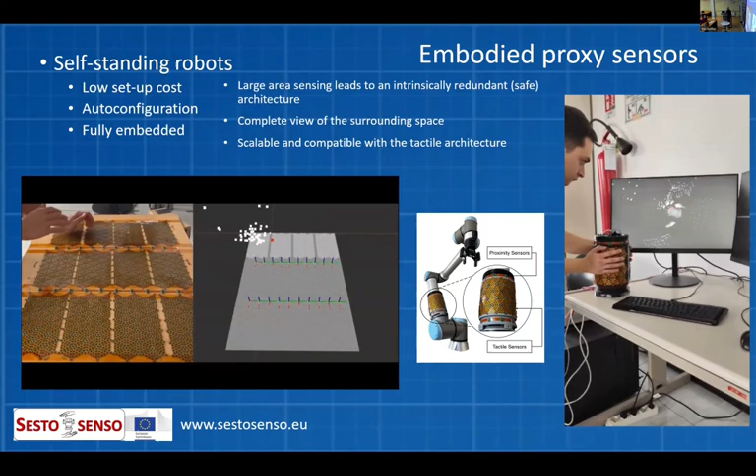So you are touching with your gesture. There is no physical interaction until you get physical contact, but the information that the proxy tactile system provides is a kind of contact, like the wizard in the magician shows, and so on.

And I'm done. But the very last bit is this one. I said Europe is leading.

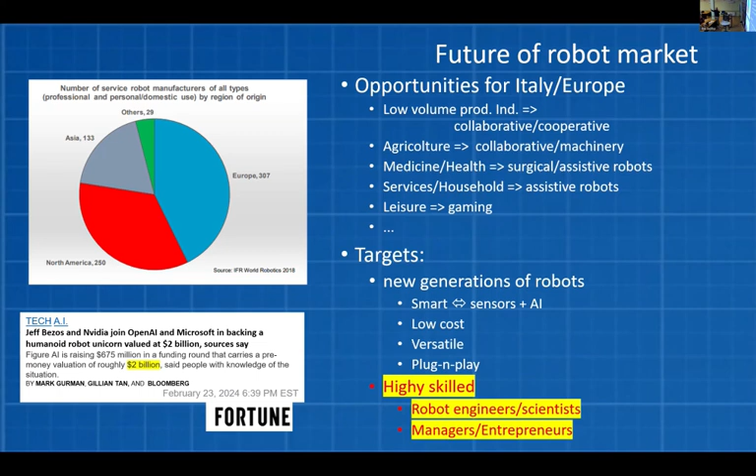So this is why I think that, despite the certainly small added value of our research—maybe yes, maybe no, I don't know—these are the reasons why investing and putting effort into research and into the formation of young, skilled robot engineers matters. When I say robot engineers, I mean a broad area of competencies.

Thank you. It's late. No, people are impressed. That would be great.